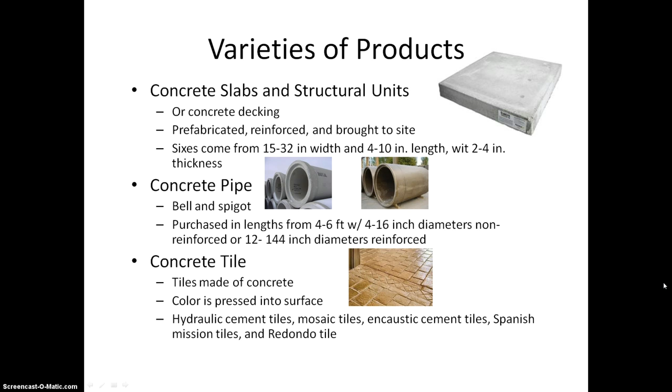Alright, next we have veneer concrete, which is also known as basic precast concrete. And then something you can do with the product is you can make countertops. Concrete, you have to be careful with though. If it's not sealed, concrete can stain and scratch easily, especially with acidic liquids. And if it is sealed with an epoxy sealer, you cannot put hot pots on the concrete because it will melt the sealer. So you could put hot pots on the concrete if it's unsealed, but then you have to deal with the scratches and stains.

So pick your poison. And then also the concrete countertops are very heavy, so you want to consider different finishes like a drop-down front edge or dividing lines in the countertop to break up the slabs, thus breaking up the weight of the concrete, or simply using lightweight concrete. Then lastly we have floors, which are laid the same way concrete would be installed outside on the sidewalk, and you have many finish options.

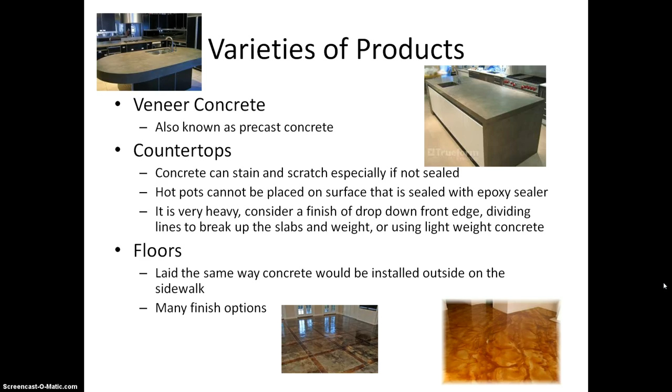Alright, here we go, textures and finishes. So first we have plain textured, which is just your typical concrete surface. And then we have stamped, which are imitations made by stamping the concrete with a rubber stamp to look like, for example, cobblestone, fieldstone, slate, and brick. And that's what that picture up in the upper right-hand corner is.

Then we have stained, and it's a chemical reaction that makes the chosen color richer and more permanent. So, for example, I have that picture of the fantastic, vibrant, jewel-toned blue concrete floor there. And then we have integrally colored concrete, and this is pigment added to the actual concrete mixture during the making of concrete, but the color is much less intense, as you can see.

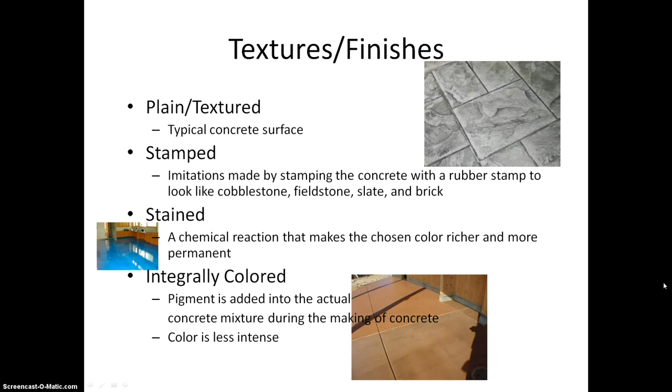Alright, exposed aggregate is a rugged textured concrete. It is non-skid and heavy wearing, and you apply a transparent sealer to protect it, and it really shows the kind of true nature of concrete. Then we have stenciled concrete, which is similar to stamped concrete, but instead you use a disposable paper stencil, and that's the example on the stairs there.

And then we have engraved, which uses tools to cut brick, tile, or cobblestone patterns into hardened concrete. And this will not wear or lose over time and with traffic, so it will last just as long as any other type of finish you use for the concrete. And that's the bottom picture.

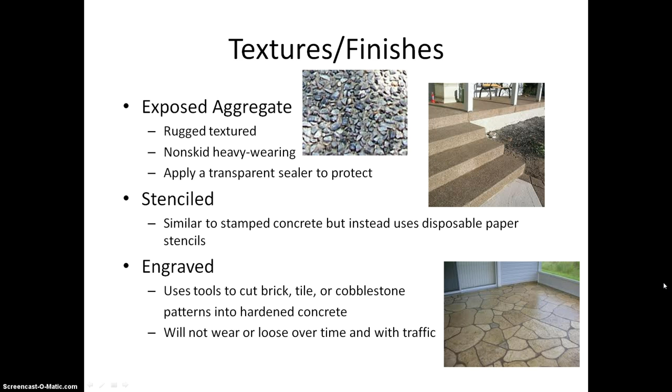Alright, then we have bush hammering, which is the upper left-hand corner picture, and it makes the heaviest texture with a sand cement matrix power tool. Then sandblasting, and that's the picture you see with the guy with the mask and the tube. He's sandblasting, and it's sand applied to concrete to add texture to it. Then we have acid etching, which uses acid to etch the design into the concrete, and sun deck, which is spray-on texture, which lowers the temperature of the concrete.

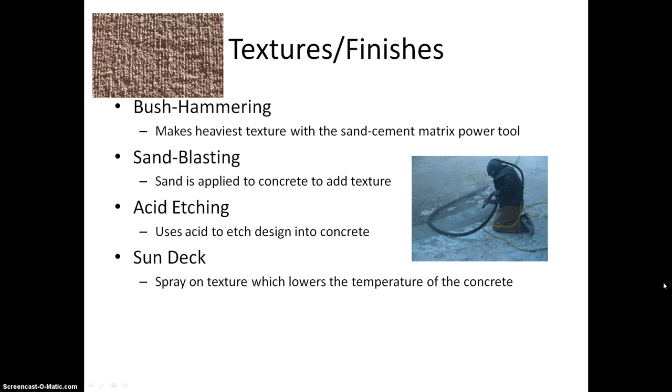Alright, sustainability. Concrete is very sustainable. If you read the report, it goes way in depth on why concrete is sustainable, but basically, the materials can be found all over the world, so there's no shortage of materials for making concrete. It's made up of 3 basic materials, which is water, aggregate, basically crushed rocks, and cement, which is made with low energy usage, and the ingredients are limestone, and they're very sustainable. And then lastly, other building alternatives like steel use more energy to make them, and so therefore steel is less sustainable.

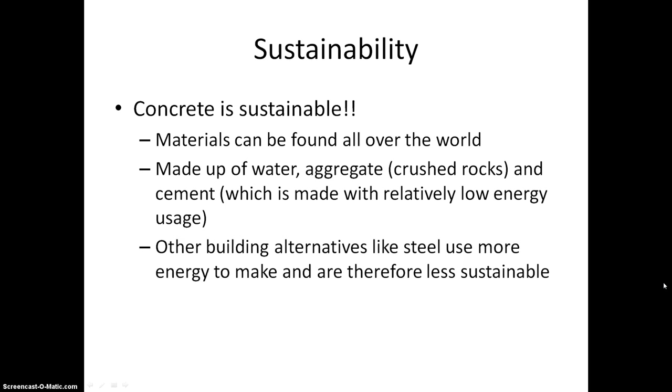Alright, almost done. Disability considerations, or ADA requirements. Concrete is a very slick surface, as I'm sure you all have noticed, especially when wet. So textures need to be put in the concrete with a stamp, or if you're outside with an Armor-Tile, which are the examples there, those yellow pictures. So this prevents people from slipping, or inside if you want to do different finishes to create textures that are also aesthetically pleasing, that would be a good idea so you don't slip and fall.

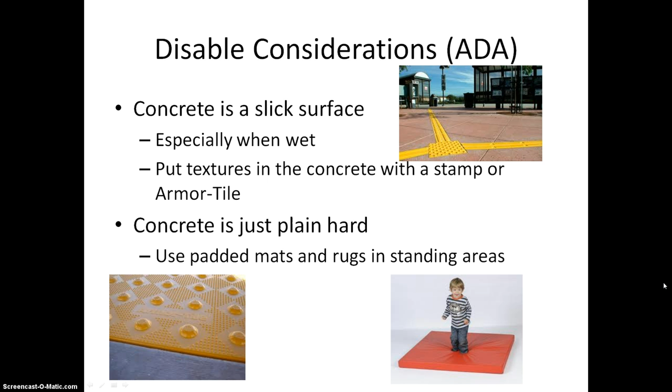And then concrete is just plain hard. So especially in areas where you're going to be standing a lot, you're going to want to have mats and padded rugs and such, just like the cute little boy there on the red rug.

All right, fire codes. Concrete is pretty much naturally fire resistant, although cracking and fractures can occur in the surface under extreme heat. And this is tested by the ASTM E119 for a rating of up to 4 hours.